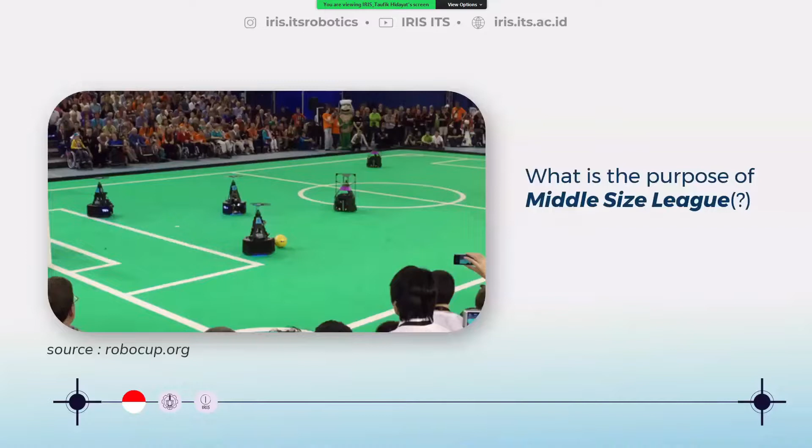And on this beautiful day, we would like to present to you and are glad to discuss our research about methods on increasing goal probability. First, we'll talk about the middle-size league. What is the purpose of it? The middle-size league itself is a 5x5 robot competition which aims to score goals as much as possible. The winner will be determined by most goals, but there is a thing that we want to solve.

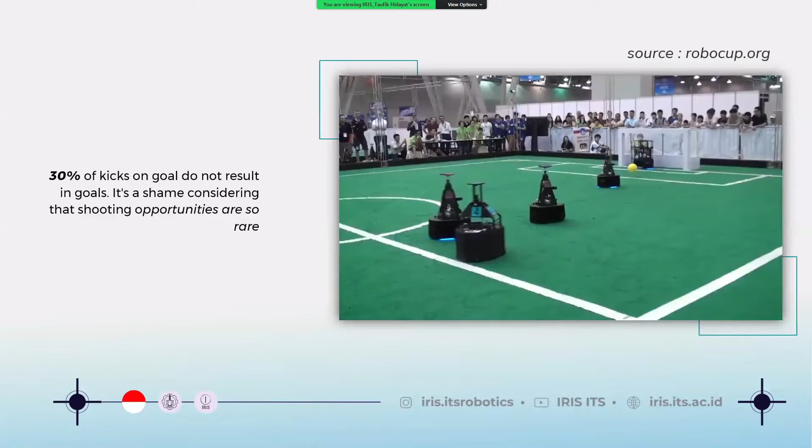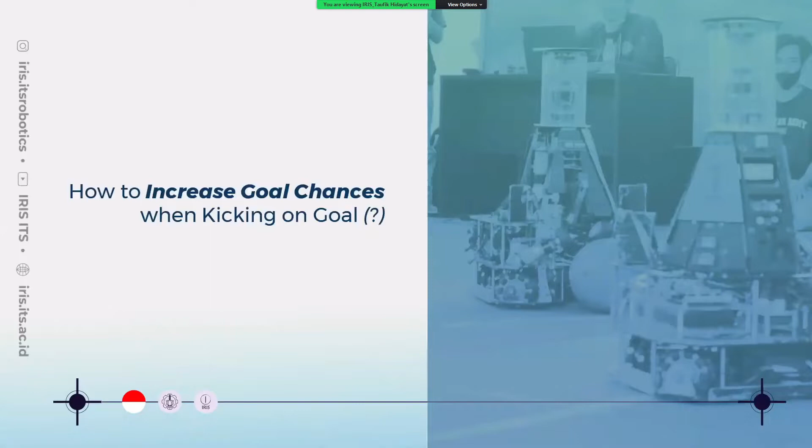The thing is, right now, at least 30% of robot shots can't score any goal. It's deeply regretted because the chance to shoot is a very rare chance. It would be a big advantage if the robot could maximize this opportunity. And you have seen robots failing at scoring in this video. Then, a question will come up in our heads about how to increase the scoring probability from the robot kicker.

Now, let's see some upcoming video clips. First, we have long-range kicks by some football players. All of those kicks are aiming in the same direction. It is the top corner, no matter the top left or the top right of the goalpost. From all of those shots, we could conclude that there are 2 main keys to scoring a goal: first is a powerful kick, and second is the ball direction.

According to the analysis of torques and forces applied on a free kick in football, 2010, the minimum ball speed required to overwhelm the goalkeeper is around 50 km per hour. There are a lot of factors that affect the generated ball speed, like foot weight and the foot center of mass from the distal point, etc. But the most influential factor is how much power is given to the ball.

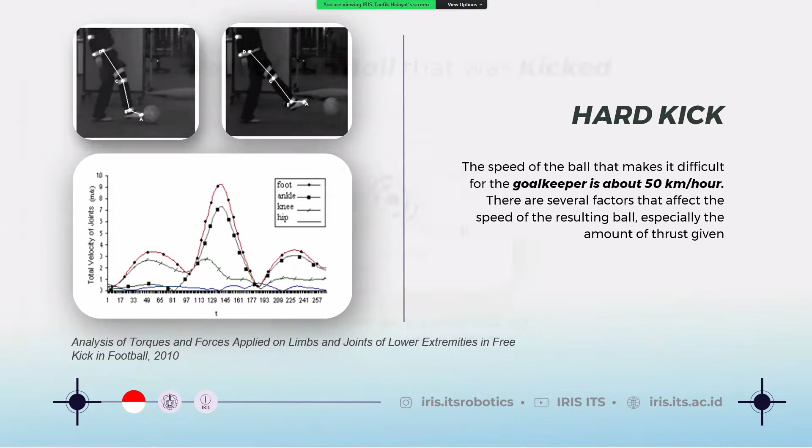Kicks that are difficult to predict are kicks that have an intersection angle. To make the ball have an angle of intersection, a soccer player must kick the ball at the center mass point of the ball. Then, the ball is kicked sideways using the inside of the foot, causing the ball to spin. When the ball is moving, the air will be in the opposite direction. By shooting the center of mass of the ball, it would be better. Why? Because there will be no energy being converted to spin.

The kick that would overwhelm the goalkeeper is a kick aiming at the farthest point from the keeper and at the farthest pole at the same time. In this case, it's the top left or right corner of the goalpost. Actually, this technique has been discovered before, but sadly, it's still hard to implement in real life due to some reasons, like player skill.

And now, the question is: is our robot ready and capable of doing this kind of shot? To make it happen, we still need some more improvement, in both the hardware and the software. First, we need to improve our kicker. Previously, our robot used a brushless motor with a gearbox to increase its torque. You can see our old kicker on the top right of your screen, but this method has some disadvantages: it is not fixed, so sometimes it could detach from our robot. Sometimes it also hit the robot's cable, and the kicker sensor is not that sensitive, so sometimes it doesn't detect any kicker motion.

Therefore, we changed our system to a solenoid, and we are aiming for a torque value of 17 Newton meters. Therefore, we use the following equation that you can see on your screen. From these references, we also got a very good solenoid specification to be applied as a kicker, and we have implemented it in our robot with the following specification, which you can read on your screen.

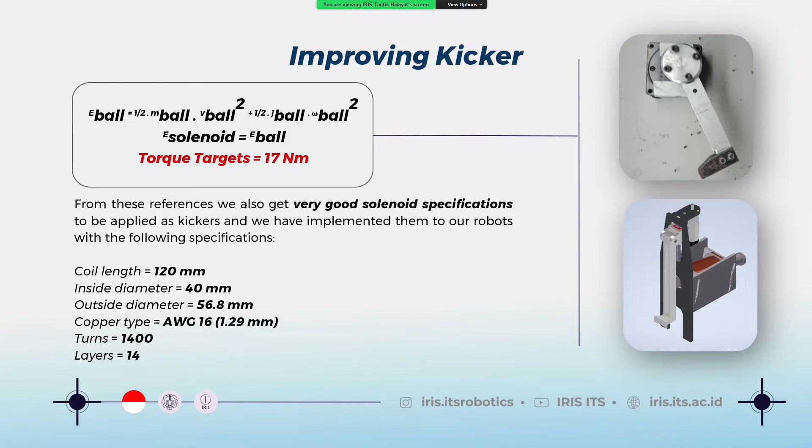And to decide the kicker's direction, we will need the goalpost and goalkeeper's position. Therefore, we added a camera sensor to take the visual data. We use a webcam because it has a wide angle and an automatic low light correction feature, which helps goalpost detection.

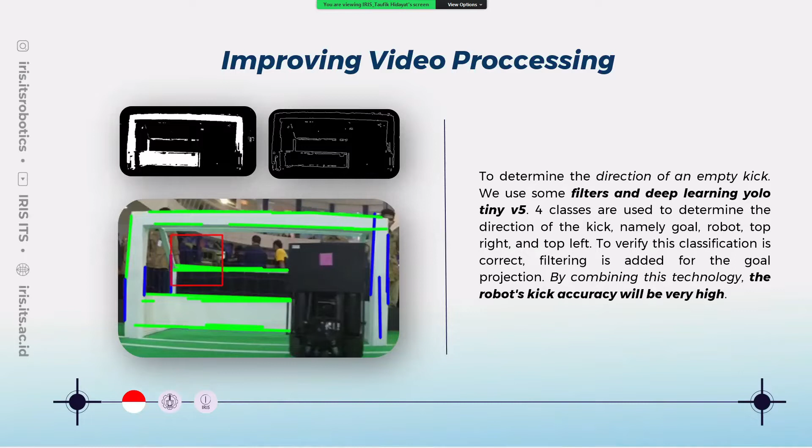From our webcam data, we would proceed through two steps of verification. First, we will use YOLO classification, and in this case, we are using Tiny YOLO version 5. Why? Because it's lighter and has a higher accuracy. Then, we will add a filter to verify the data to prevent a false detection.

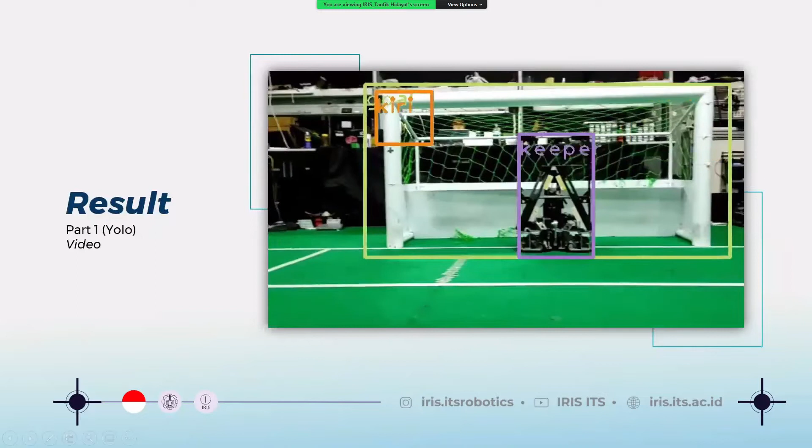Here is some technology set up to generate the desired output, and from the left side, there are kicker, camera, and kicker test using solenoid. First, we have our processing technology. From this classification, it will decide the direction of the ball to the upper right or left corner. This position will surely overwhelm the keeper.

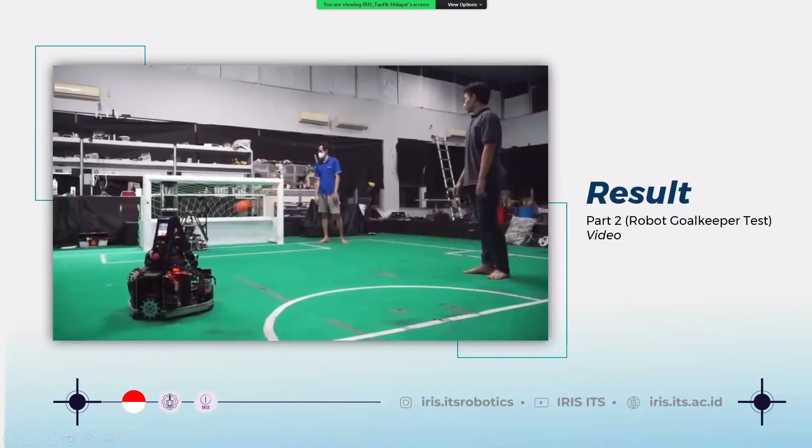Next, we have field system testing. We use some different variations of robot goalpost distance to test our algorithm flexibility, which we have developed before. We also add a human role to pass the ball to test the robot's speed and latency when it sees the goalpost for the first time.

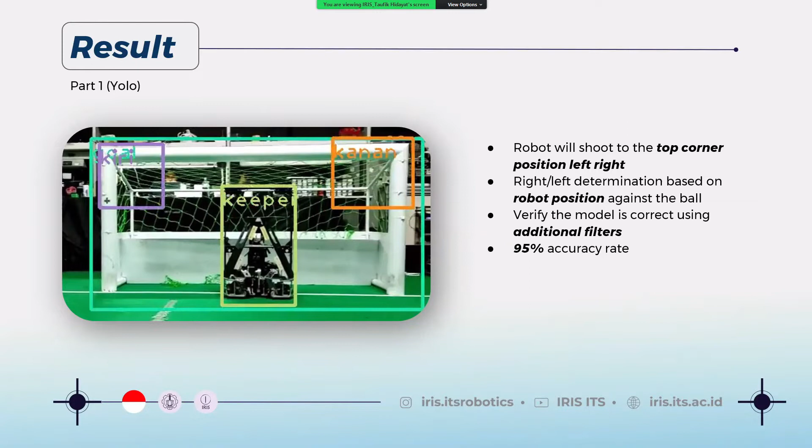Our algorithm with YOLO could classify some objects like goalposts, robots, right top corner, and left top corner with accuracy up to 95%. And to prevent false detection, we also use an additional filter to verify that it is a goalpost and not a normal ball. And we also use a fuzzy controller to set the ball's direction to top left or right corner. This algorithm is important so that even if the robot has a different position, the top corner kick will be stable.

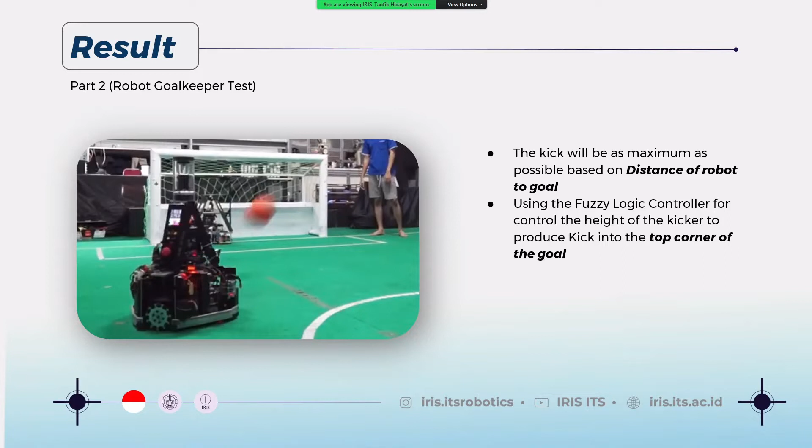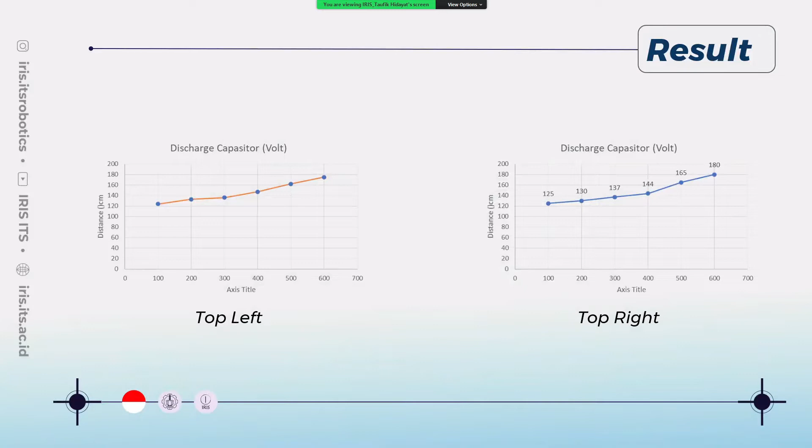Besides, we also use capacitor discharge voltage as a variable because the kicker speed depends on it. And you will see a table here, and here is some chart record of some different distance and height variations, and also some encoder variation. The graph that you see here is the distance and capacitor voltage comparison. The top corner left and right look almost the same. All of the 40 tests were able to make a score, which leads us to a conclusion that it has accuracy up to 100%.

So, how about coaching a real goalkeeper? Before that, we have to set some systems that we would use. We have to make a class that has a person, goal, top right, and top corner variable. Then, we set the target to 2x3 football goalpost size. We also need to tune our capacitor discharge voltage and position encoder to match the 2x3 goal size. Our subject is an amateur goalkeeper from Temanggung Futsal Club.

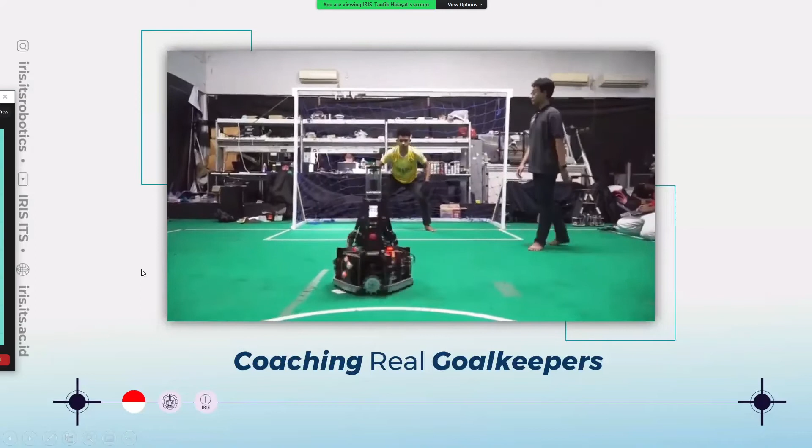Our target is to determine the weakness of the keeper. Based on the statistics of some random kicks done by our robot, the direction would be the top corner to overwhelm our goalkeeper. And we have divided our goalpost into 9 parts to define the keeper's weakness. And the upcoming video is a video of our goalkeeper playing with our robot. From all of the tests that have been done, we can conclude that our goalkeeper has a weakness on goal number 1, which means the top left corner.

Last but not least, we can conclude that the success rate of goals can be increased by increasing the power of the kick and directing it to the far post so that it is difficult for the goalkeeper. And by using robots and deep learning, futsal goalkeepers can be trained to determine goalkeeper weakness and improve reflexes. And for future development, we will make a design of a goalkeeper training using this system on a wider scale. And in this case, it's a football goalkeeper trainer.

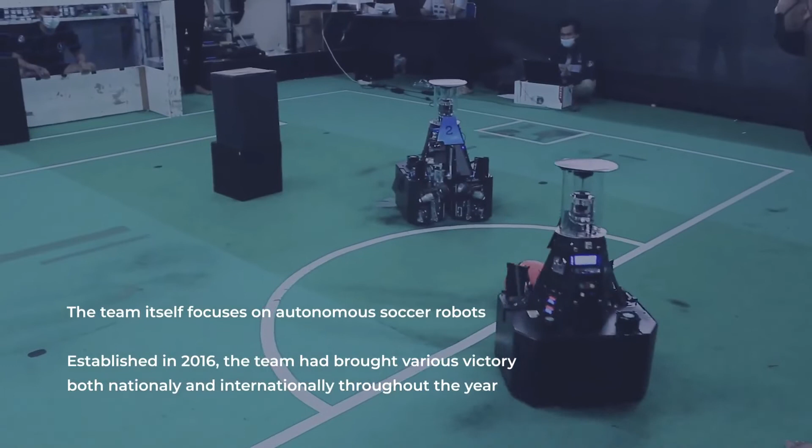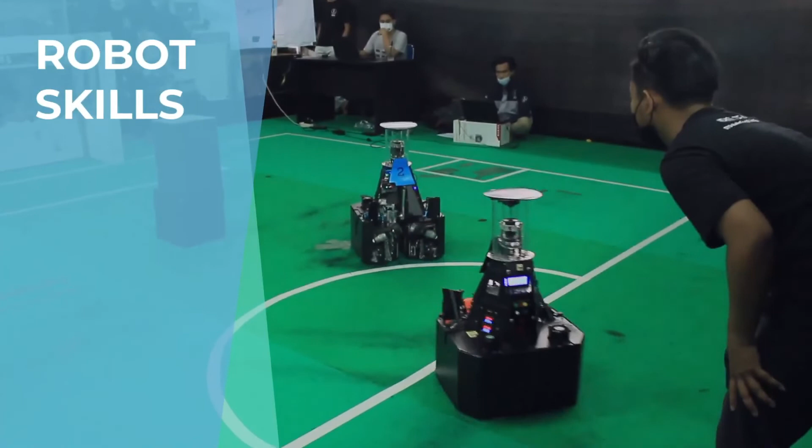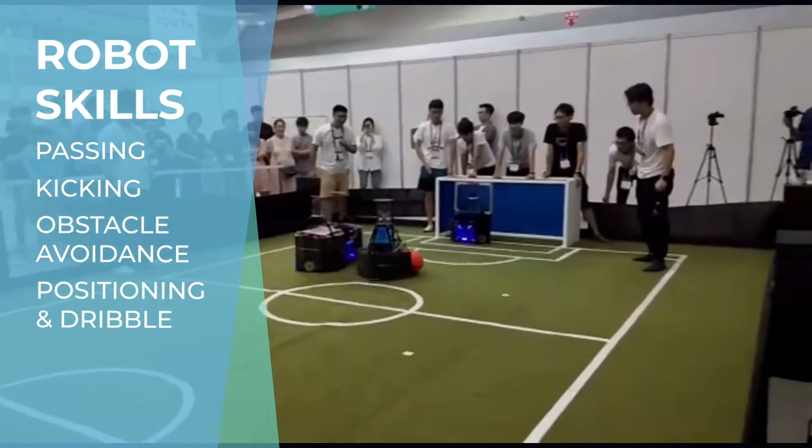Iris is ITS Robot with an Intelligent System. This team focuses on soccer robot development. Our robot has many abilities such as passing, kicking, obstacle avoidance, positioning and dribble, and also keeper defense.

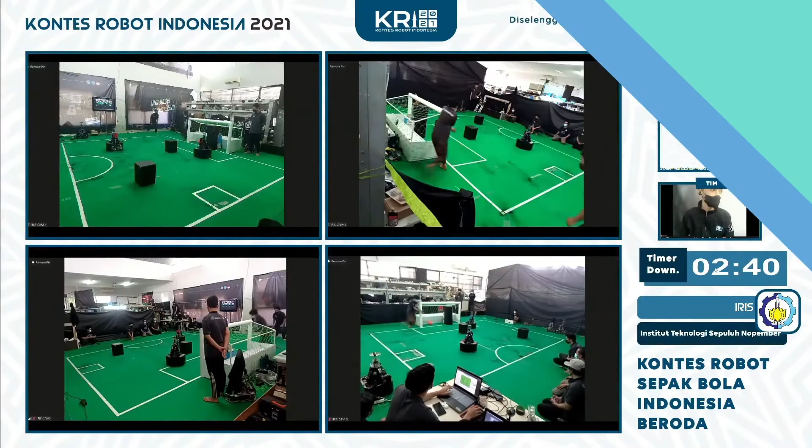Iris has joined a lot of competitions such as Kontes Robot Indonesia and RoboCup. On Kontes Robot Indonesia 2021, Iris got second place and best design.

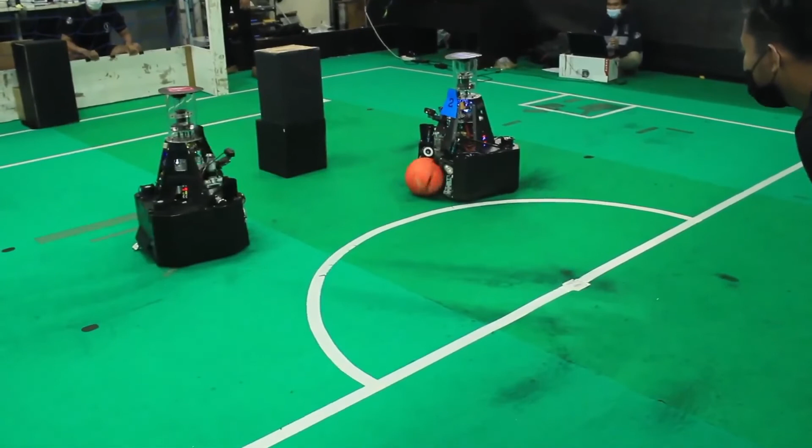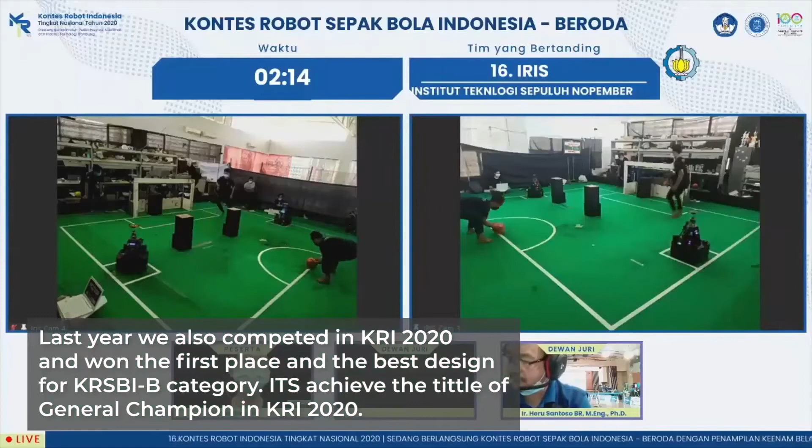And then, on Kontes Robot Indonesia 2020, Iris got first place and also best design. And then, ITS also got the General Championship for 4 years in a row.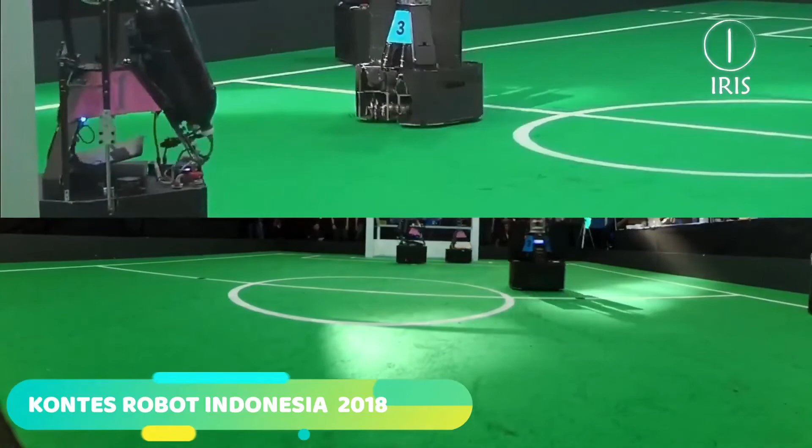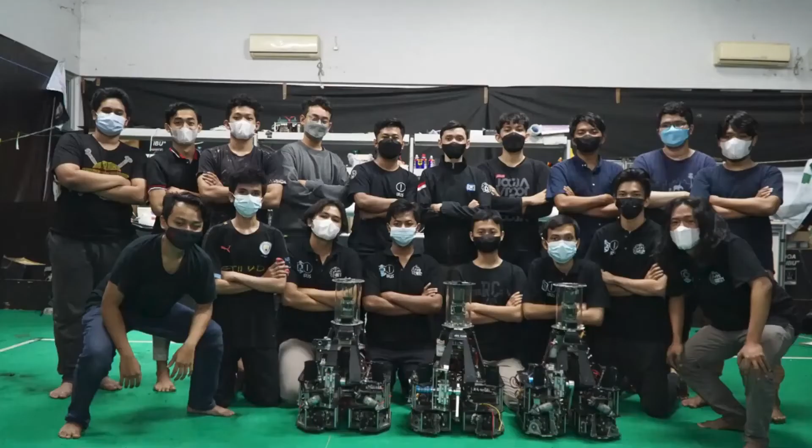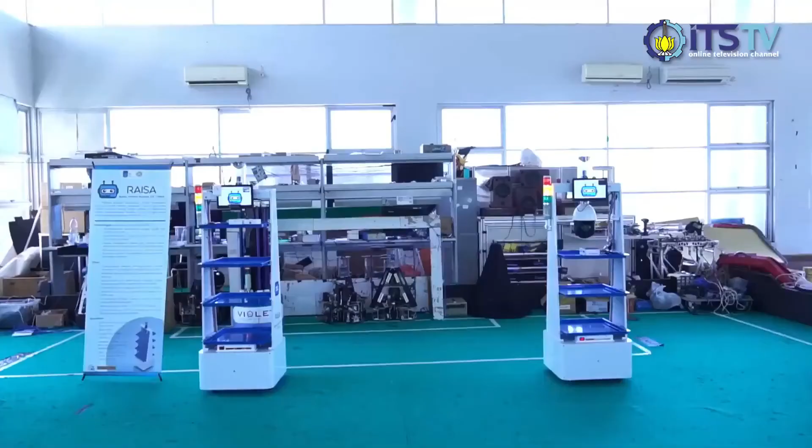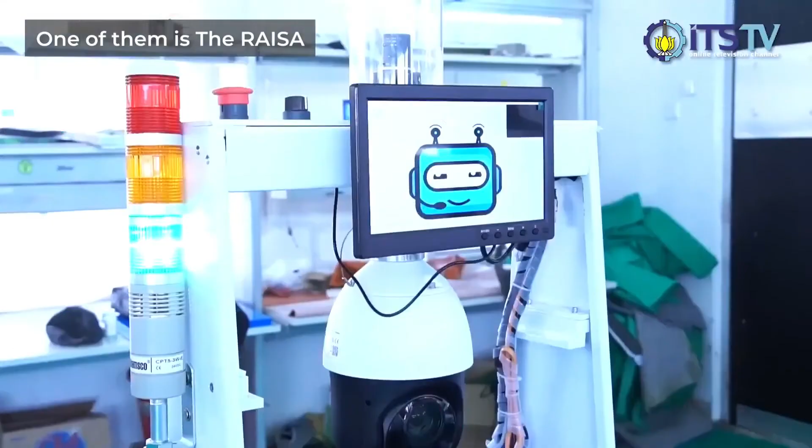For your information, Iris not only participates in competitions but also contributes in the health sector to help nurses, especially during the pandemic, with Raisa, a robot medical assistant, and Violeta, robot ultraviolet. Raisa can help nurses do their tasks such as bringing many items, measuring the patient's body temperature and oxygen levels. 22 units of Raisa have been used in 17 hospitals in Indonesia and the number is still increasing until now.

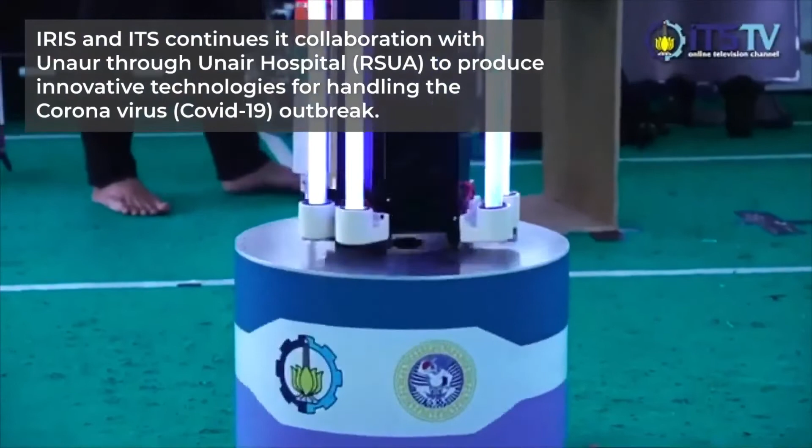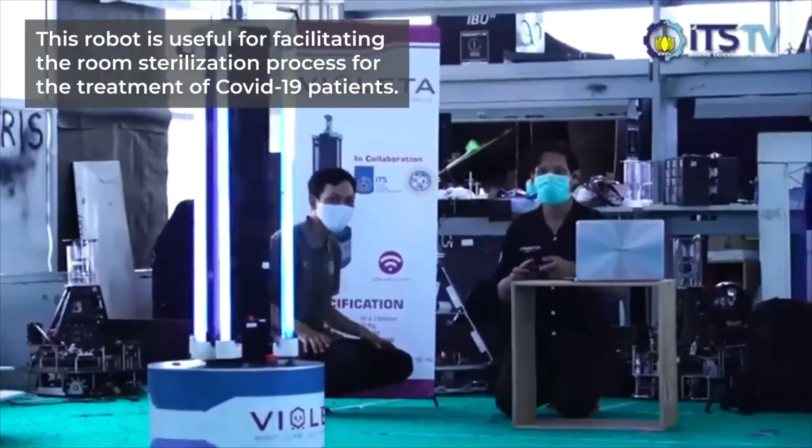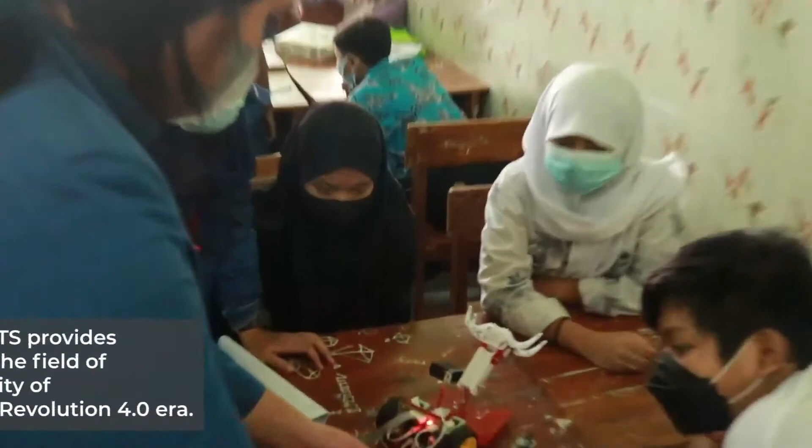Besides Raisa, Iris also contributes to the development of Violeta, a robot which has the ability to sterilize a room with UV light. In addition to conducting research and development on robots, we also have a program to introduce the world of robots to students with the aim of increasing their understanding of the world of robots. This year, it was held at MTS Nurul Islam.